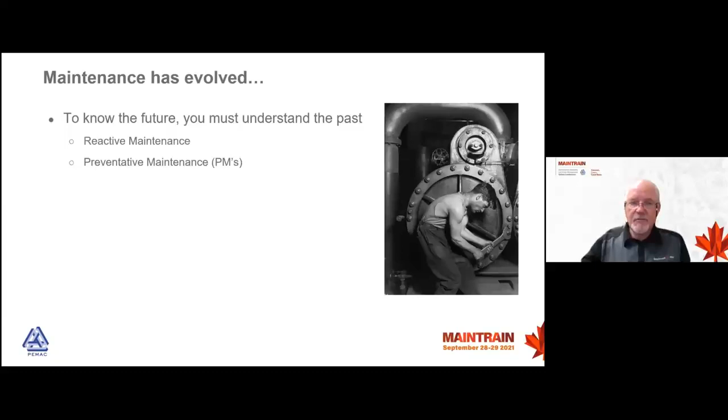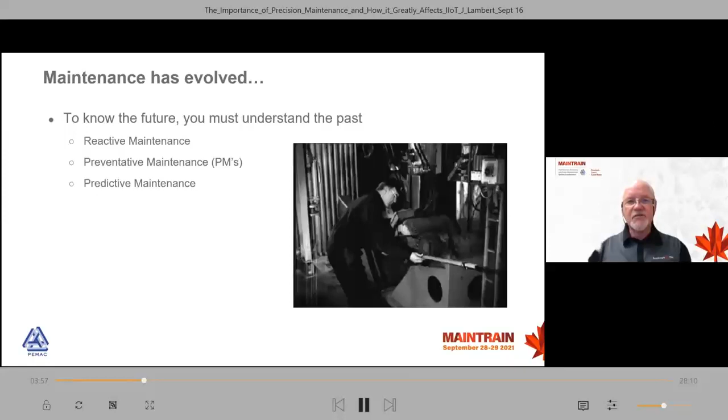But then the new technology was developed, vibration analysis, or should I say it became more available. This technology could find the elusive fault, the potential failure. It was the vibration instrument companies that ushered in the strategy called predictive maintenance, surrounded by hype, which led us to believe that it could do just about everything. Not unlike the hype that surrounds the industrial Internet of Things today. The mantra was, if you are not doing predictive maintenance, you are not doing maintenance. What that did was make past tense of preventative maintenance.

The point was made that preventative maintenance was over maintenance because we opened machines up to examine them, which back in those days was true, but not now. Predictive maintenance is the new maintenance, said the hype. In my opinion, we blew it with predictive maintenance.

Maintenance evolves, moving forward with new technologies and process changes. And sometimes it moves back because of a lack of training on a new instrument or on a new process. Or a reduction in staff can make a huge difference. To be proactive, you may be in the proactive mode one week and then slip back into the reactive mode the next. For me, proactive maintenance using breakdown analysis along with condition-based maintenance saved the day.

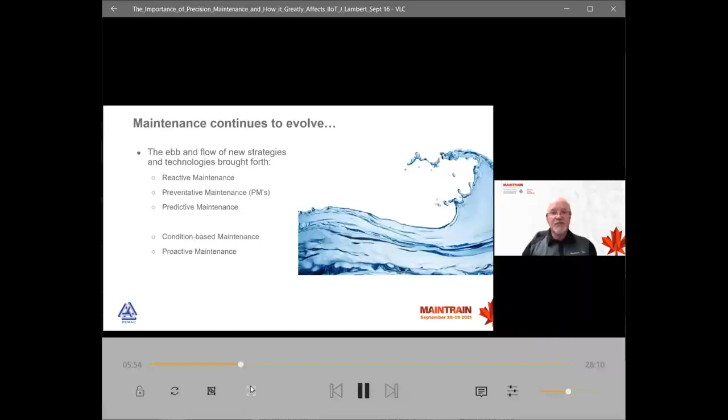The reason I'm showing you all of this is we still need these basic strategies and more as we continue down the road of maintenance. Proactive maintenance. Actually, with predictive maintenance, we focused and fixed the fault. If we found a bad motor, we replaced the motor. It didn't matter if it was a lubrication issue, a broken rotor bar, or an inner race. We replaced the whole motor.

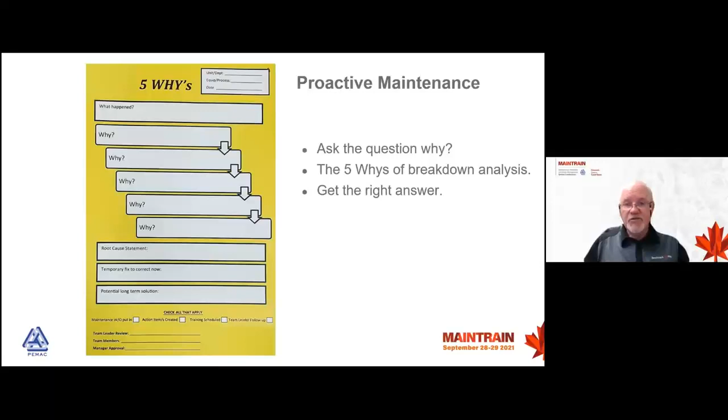However, proactive maintenance moved us away from focusing on the fault. Asking the question why was our first starting point. It was said that asking the question why five times would lead you to the problem or the cause. Sounds easy, but it's not. One important point is that you might have the right questions, but you need to get the right answers in order to find out what the problem or the cause is. And that would be the correct, honest answers, which is not always easy.

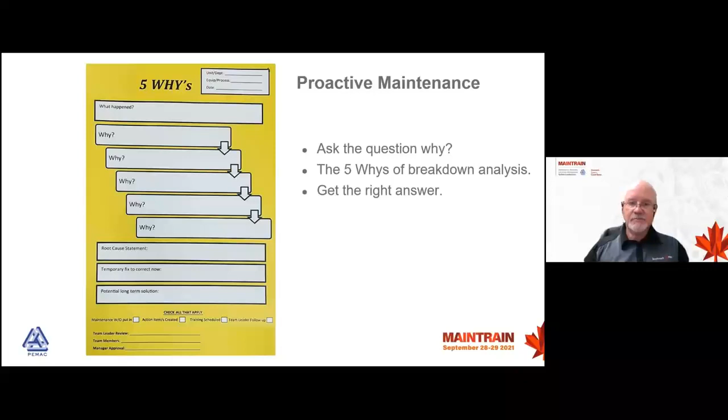A definition of insanity is to do the same thing over and over and expect a different result. If we keep replacing bearings and don't figure out what's causing the failure, are we crazy? Again, with predictive maintenance, we focused on the fault. If the bearing was at fault, we replaced the bearing. The bearing was the effect. We needed to find the cause. Proactive maintenance introduced us to root cause analysis, which is cause and effect. Being proactive is more than just doing maintenance. It's doing the right maintenance, which is fixing the cause forever rather than forever fixing the effect.

Root cause analysis using a fishbone diagram is a skill that many still have not mastered. And it is a critical part of the maintenance process.

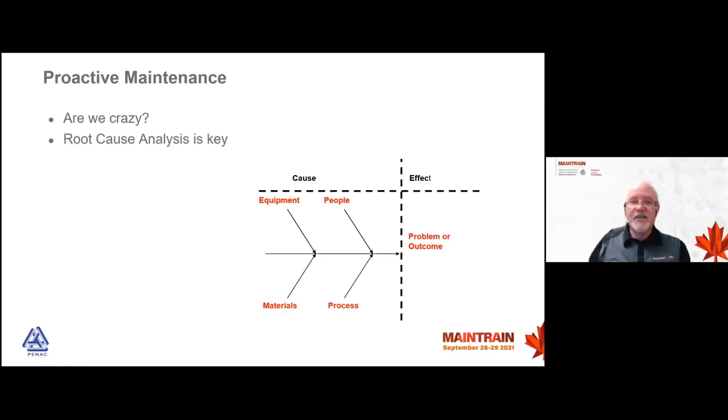Selecting the right manufacturing improvement tools. All of the basic maintenance strategies programs that I just discussed with you are still featured in some form in these structured maintenance programs. The difference is you pay for them when they're in a program. Ron Moore, author of Selecting the Right Manufacturing Improvement Tools, called these programs tools, and he published a list of 75. This is just a sample of them. But let me ask, how successful are they? Do they work? Do you see the numbers? I am told the failure rate for these programs is as high as 70%. Why is that, do you think?

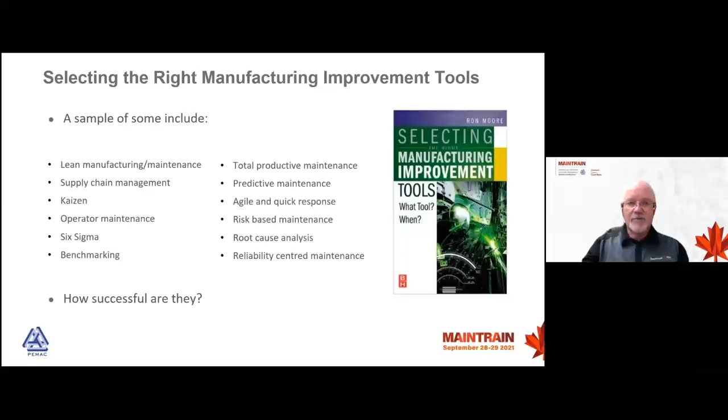I took reliability-centered maintenance, and my task was to implement it into the engineering and maintenance department in the plant that I worked at. RCM2 by John Moubray was the big one, or maybe is the big one. It sure gets the most attention and the most ink in my day. The problem with these programs is they are hard to implement. They take a lot of resource time, man hours for training, etc. And if you have a plant to run, you can get short of man hours very quickly. These programs do work, but you may not have the resources, the people, to do it all.

But even if you can't do it all, you can still do parts of the program that are easier for you to implement. I think of the fact that I have Microsoft Office, but I don't use all of it. But I use what I need, and you can do the same with RCM. What the training taught me was the benefits of understanding the P-F interval curve, as well as the great benefits of root cause analysis and condition monitoring programs.

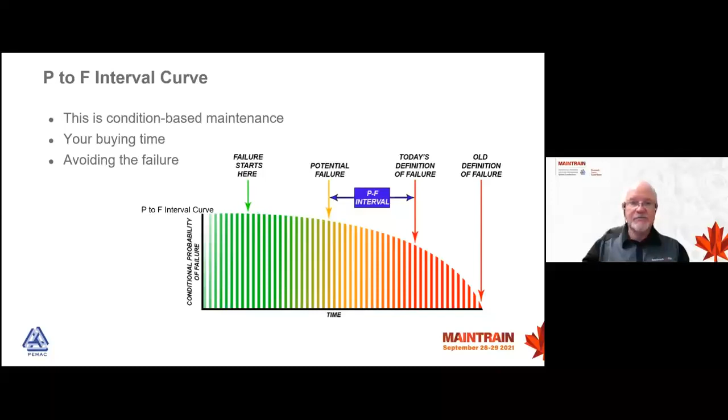This is a reliability-centered maintenance case study. Why do we still have breakdowns? This is a question that was asked of Doug Plucknette of Reliability Solutions. The question was from an organization that had been applying vibration analysis, predictive maintenance to over 800 assets for 3 years. They were successful at finding point P, potential failure, thus saving downtime, but still having assets, machines, go into

alarm. Okay, quickly, Doug Plucknette is a reliability-centered maintenance practitioner, trainer, mentor. He has performed RCM analysis for companies around the world, a guru, if you will. If you are into reliability, I'm sure you will know who Doug is.

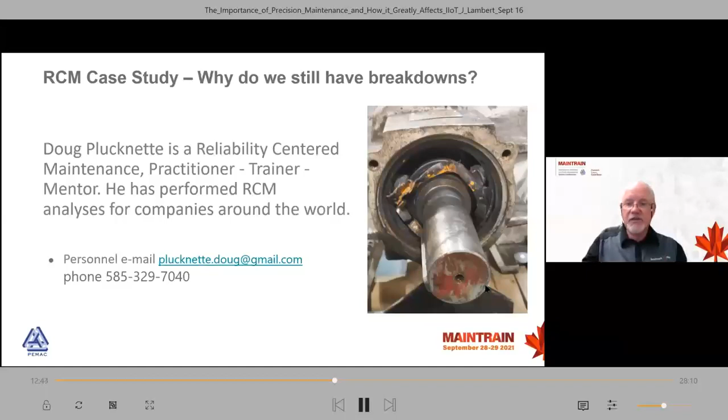Again, the question was, why do we still have breakdowns? Before he answered, a reliability-centered maintenance analysis was done. It identified 140 different failure modes, including misalignment, soft foot, pipe stress, lack of lubrication, cracked foundations, improper belt tension, improper design and application, and on and on.

All the failure modes on the list covered in the organization's RCM analysis had two things in common. Each one could be eliminated through either a simple redesign or better maintenance installation practices. As a way of explaining it to his customer, Plucknette of Reliability Solutions added the I for installation and the D for design to the P-F interval curve, as you can see on the screen. He correctly pointed out that all the problems that led to the potential failure and eventual failure were under the D and the I. What does this mean?

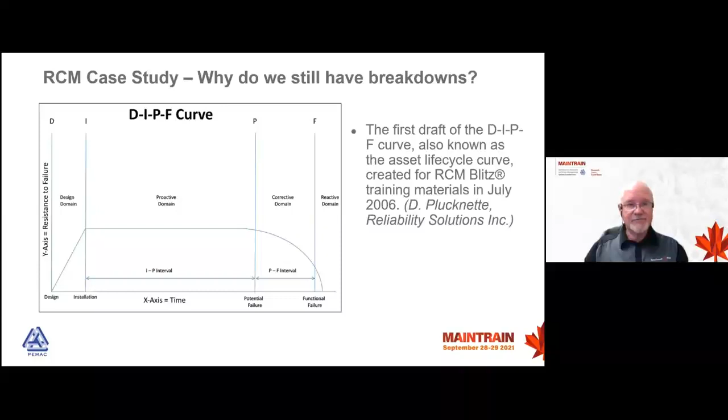Well, Plucknette says, while a large percentage of reliability efforts are focused on detecting point P, the truth is, if the organization simply did the right thing first, point P would very rarely rear its ugly head. This is not rocket science. Most of us that were in the machine installation business knew this. But Doug was the first to articulate it, so kudos to Doug.

But look at this graph. You can see condition monitoring is on the right and preventative maintenance is on the left. And simply put, if you do D and I right, you can push P and F very far to the right. In my experience, there is very little redesign work done in comparison to the poor installation work. I can even put a number on it. I would guess that it's 10%, especially in an oil plant. But even if I said it was 20%, that would mean installation is 80% of your problems. So the low-hanging fruit for us all is in the I, which is installation.

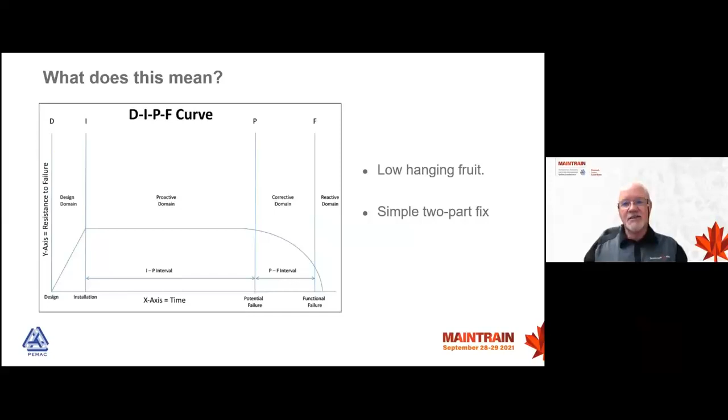Looking for P, the potential failure, is condition-based maintenance. I is preventative maintenance, and an ounce of prevention is worth a pound of cure. The installation is the problem, and the fix is a two-part process. Part one, precision maintenance is a method of performing maintenance tasks so that they are always done with consistency, accuracy, and to a known standard.

I'm actually going to read that again. Precision maintenance is a method of performing maintenance tasks so that they are always done with consistency, accuracy, to a known standard. It means to work to a set tolerance that you and your team agree on. The tighter the tolerance, the better the result. But you cannot have a tolerance that you cannot measure. Most importantly, it's commissioning to a standard and documenting the process.

The answer to the question why we asked in proactive maintenance is usually found in precision maintenance, doing it right. But don't overthink this. It simply means doing the job right. Most of us know what's right. We use the standard to give us a tolerance that we need to work to.

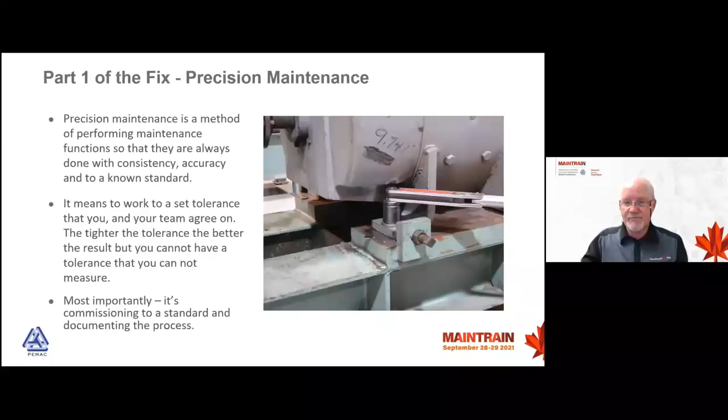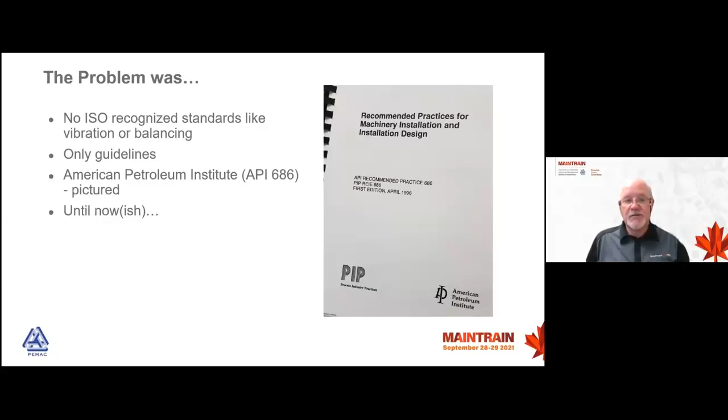Okay, the problem was, especially in my day, that we didn't have a standard for this work. There were standards for vibration levels and balancing standards, but no machinery installation standards. There were general industrial guidelines or rules of thumb, like the American Petroleum Institute API 686. However, there were no recognized standards similar to an ANSI standard or an ISO standard until 2017. This is the first shaft alignment methodology standard in the world.

It was recognized by the American National Standards Institute and the Acoustical Society of America. It was commissioned by the Vibration Institute and came into being in 2017. Not a lot of people are aware that it even exists still today.

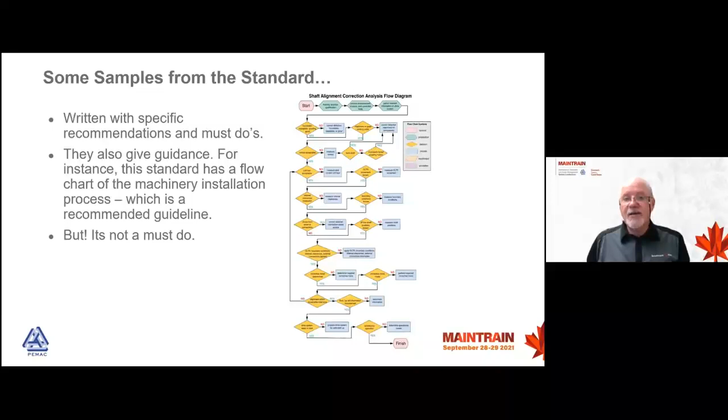Just to give you some quick hits on this, the standard is written with specific recommendations and must-dos. A must-do is thou shalt. But it's not a how-to-do book. It does give guidance. For instance, the standard has a flowchart for machinery installation, which is a recommended guideline, but it's not a must-do.

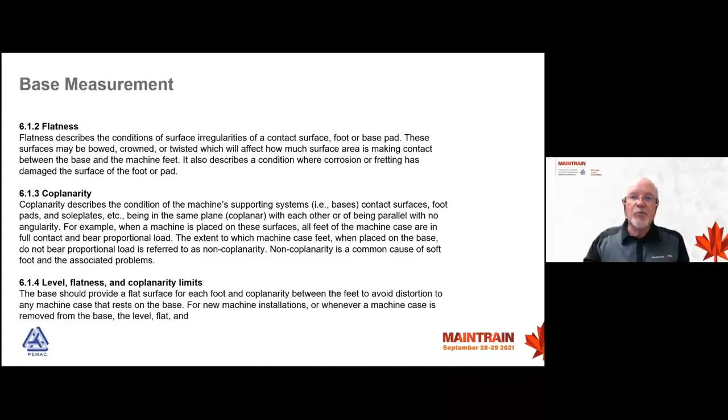The base is critical to machinery installation. Base pads and foot pads need to be measured for flatness and coplanarity, and the whole base needs to be leveled. And you can see that there are tolerances for all. Let me ask you a hypothetical question. Do you measure the bases for flatness of your machines?

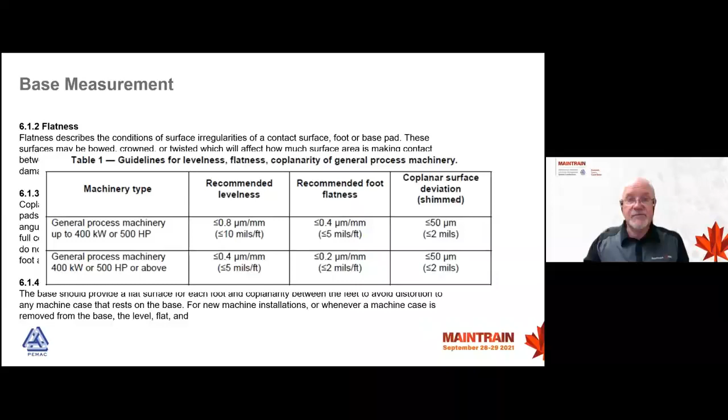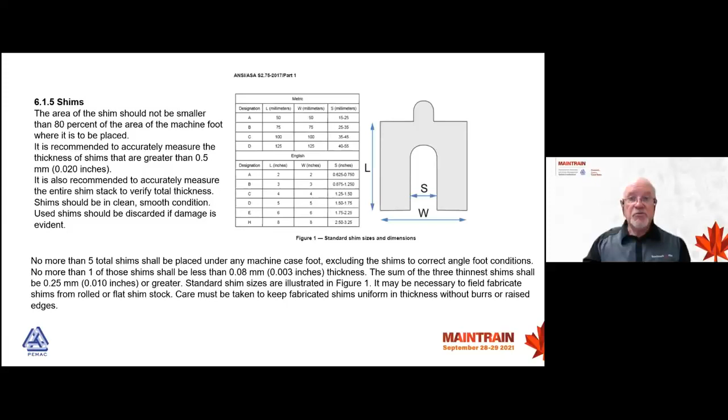Interesting. It even covers things like shims. You would not believe what I have pulled out from under a machine's foot. We know that we need to cover 80% of the machine's foot. We also know that you can only use a maximum of five shims. But do you know that we should be measuring all shims that are over 20 thou?

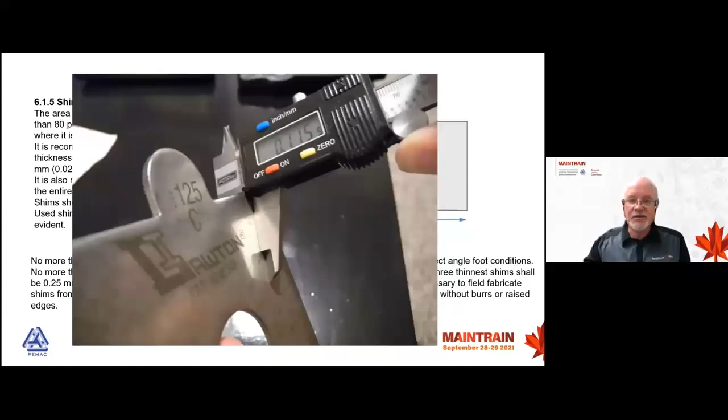The reason why is because you don't always get what you see. It's stamped 125 thou. It actually measures 115 thou. So you don't always get what you see. This is something that is not really done.

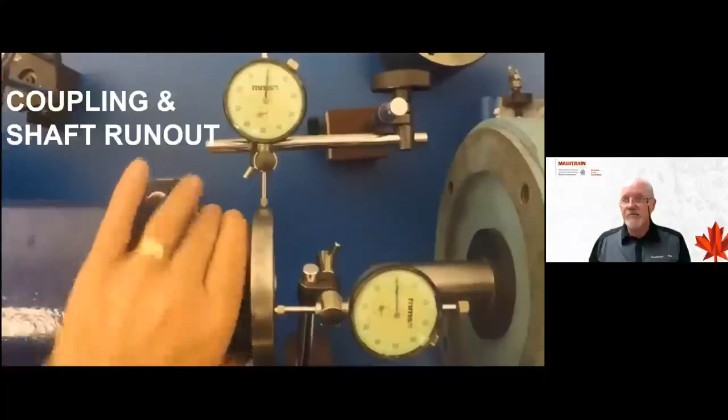We're taking a rim reading and a face reading on a coupling hub. We're measuring the runouts on the hub. The top is the rim and it's hardly moving. The side is the face and it's moving 5 thou. This will kill the machine. And appropriately, we have a standard for that. And if you're installing a large piece of machinery, you would want to get this under 1 mil, which is 1 thou.

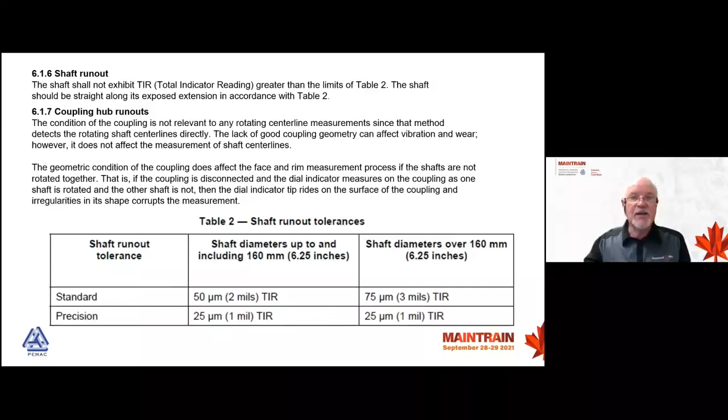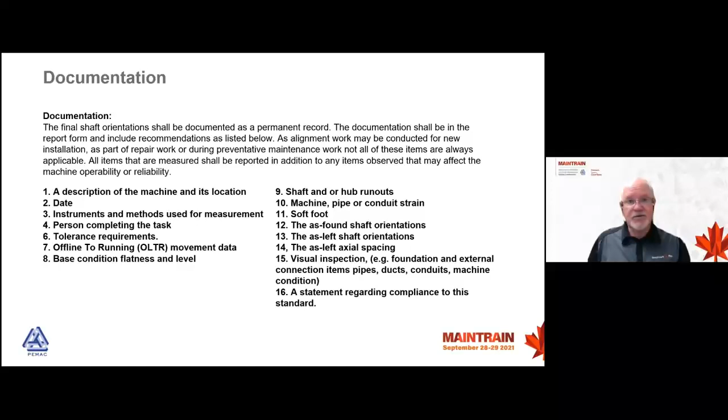For a precision maintenance installation, you need to cover and document all these items that are listed. But remember, Rome wasn't built in a day. So you can just do one machine at a time, but install or reinstall it to the best of your ability. And that, ladies and gentlemen, boys and girls, is the first part of the fix.

Part 2 of the fix is documentation. Computerized maintenance management systems greatly contributed to the evolution of maintenance. It gave us order, structure. It contains or should contain many records, reports, machinery history files, etc. One record that is a must is the installation and commissioning report. Do you have such a report? This is big.

Imagine you want to do a breakdown analysis and you do not have a written report of the last installation. You would be only guessing about what happened during the installation. If I ask a tradesman, a year after he did the job, did you align those shafts to within specification? What would you expect him to say? When I was on the tools, I would have said, yes, I did. But can you be sure? Can you make a decision on guesswork?

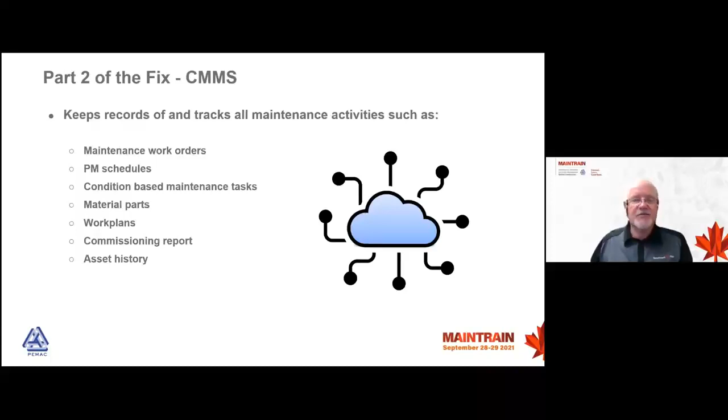This is big. This is what brings proactive maintenance down. The inability to find the fault, which means you are forever fixing the effect, not the cause. To make precision maintenance and documentation work, you need openness from all who are involved in the report. You need everybody to learn from this report. So you need the good and the bad in it, all the warts on show, and integrity, the practice of being honest. Because without it, you are guessing again.

What you don't need is politics, cover-up. Politics is usually someone else's agenda, and cover-up usually means you are protecting the individual or the team. None of this helps. You need a team approach because precision maintenance is a team game. That does not mean you have to love each other, but you're all in it together, so you might as well pull in the same direction. Pointing fingers helps no one. If a tradesman has never been shown the correct way, who should be responsible? The frontline supervisor or the department's head?

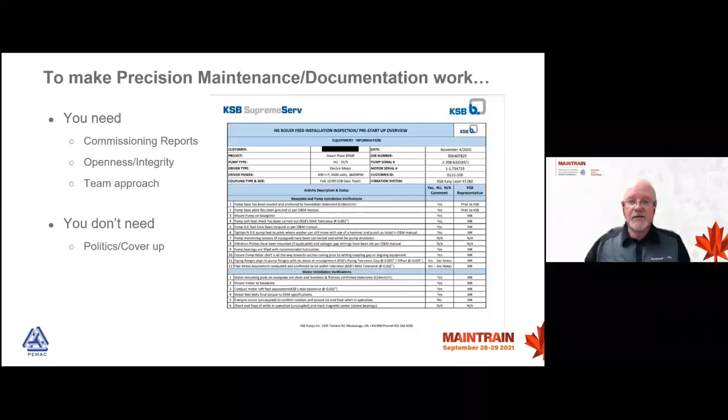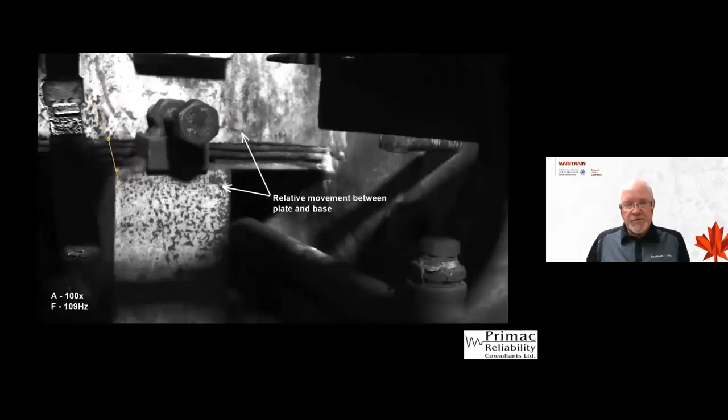I love this. This is eye candy to me. This is Primac, an expert company in Western Canada in machinery failure. If you look at the arrows, the motor is moving up and down, yet the base is moving left to right. So you can see it's way out of sync. You can see these videos, they're commonplace on LinkedIn and YouTube. And the vast majority of them point to the fact that the installation is the biggest problem.

It's not new. People who understood vibration knew this all along. But with motion amplification, now us mere mortals can visually see and get a better understanding of what's going on. So it's not a figment of my imagination, and it's not even the artificial intelligence. It's basic intelligence. Look at what's in front of us.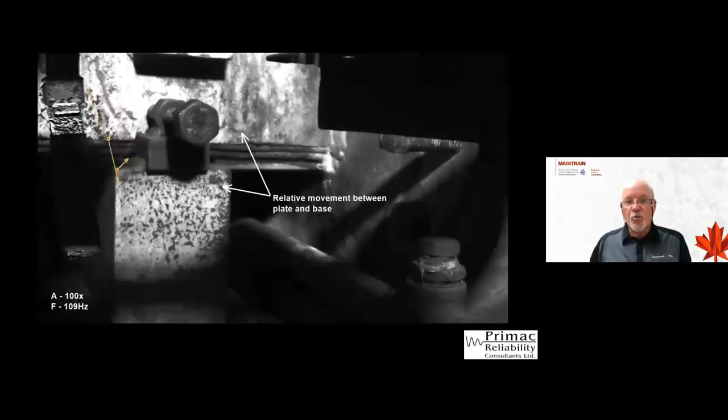Why did the strategy of prediction maintenance fail? Well, it never had a chance. We had the cart before the horse. And unless you can teach this horse to steer, this cart's going nowhere. Don't get me wrong. I love the technology that it uses. The machines were already at point P when we started. And that was due to the fact that we had done a very poor job of the installation.

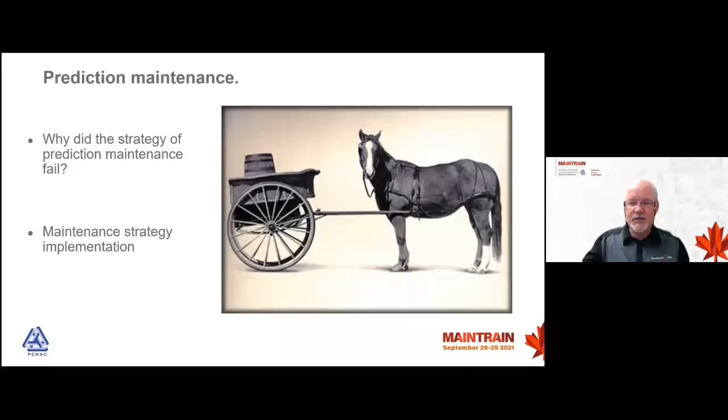Many maintenance programs struggle with implementation. They get nicknamed the flavor of the month, and they drift off into the night. I believe that the reason for this is they never really truly involve the people that matter, the guy on the wrench. Implementing a precision maintenance program needs their involvement, otherwise it fails. This is a team building exercise that is not easy.

The industrial Internet of Things has huge potential in the field of condition monitoring. It can be your eyes using cameras, even infrared cameras. It can be your ears using ultrasonics and so much more. However, you've got to give it a fighting chance to be successful by making sure machines, assets are in the optimum condition before you start measuring and monitoring.

To wrap it up, I would say that there are 3 things that will improve your installation processes and by extension, your maintenance processes. And they don't cost you an arm and a leg. 1, start a precision maintenance program. Work to a standard. Get rid of the mindset that says close enough is good enough. 2, keep detailed documentation on your machine assets. This is key. If you seriously want to improve your maintenance efforts, this is a must.

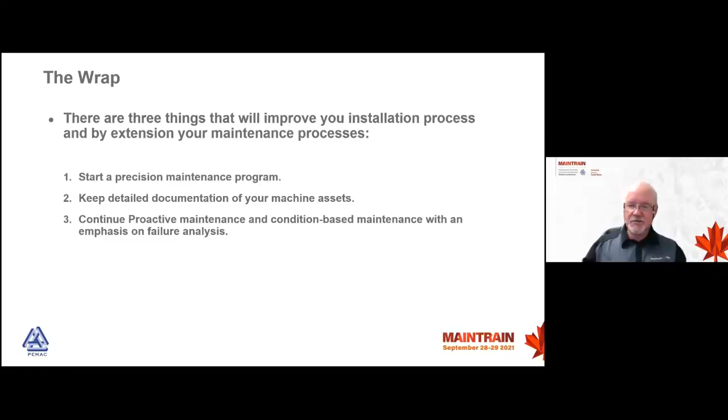3, continue proactive maintenance, condition-based maintenance, with an emphasis on machine failure analysis. It is your choice, forever fix or fix forever. Have a plan that you all agree on. This includes accountability for all, not just lip service, but tradesmen, frontline supervisors, and managers. There is no bolt of enlightenment that's coming out of the blue to fix this. There is no silver bullet. We have to look at what's in front of us.